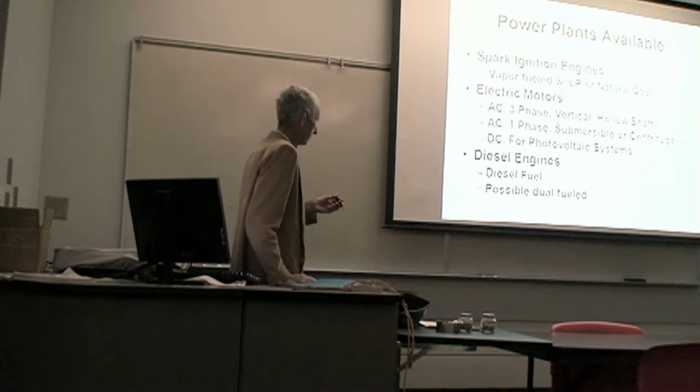Now, first thing we have to think about when we're selecting a pump, selecting a power source, is what's available to us as power sources. Spark ignition engines are the most common in the area, fueled by either LP or natural gas. There's electric motors for the larger farmers, 3-phase electric motor shafts. For you smaller farmers, they're single phase.

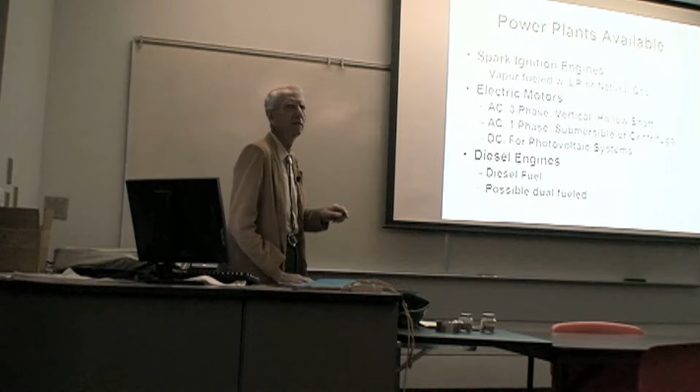Now, 3-phase is not available throughout the valley. It's not going to become available because El Paso is not looking for electrical load during the summers. They're already peaked out on air conditioning.

For photovoltaics, I showed my age here by saying DC. The new photovoltaic systems have microinverters on the back, so when you put in the PV system, you can get AC out of it. And you can get AC 1-phase, about 240 volts. So it's already set up to run a submersible pump.

And for systems up to about 10 kilowatts, El Paso Electric has to hook you up. They have to give you net metering, and they have to pay you about 10 cents a kilowatt hour that you generate, whether you use it or they use it.

If you're going to have a photovoltaic system, you have to be tied to the electric company, or else you can only pump when the sun shines. Tied to the electric company, you can pump anytime, and when you're not wanting to pump, the photovoltaic can still work and produce current back onto the electric company lines, up to 10 kilowatts. Bigger than that, you can't do it.

The last one I'll mention is diesel engines, using diesel fuel, possibly doing some dual fueling with that.

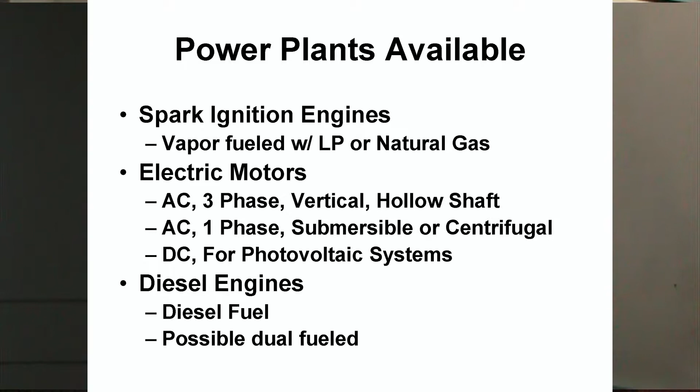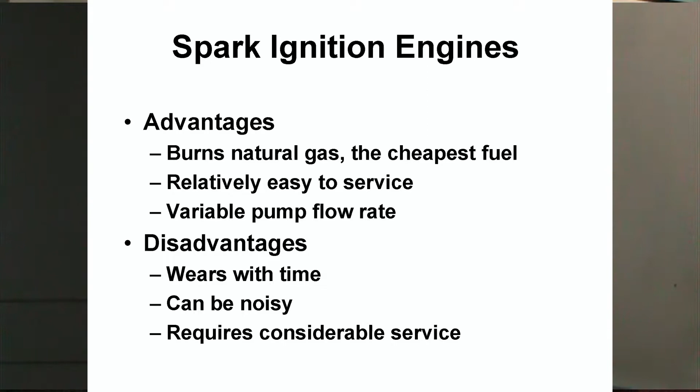The disadvantage is it wears with time. An internal combustion engine will last about so many million revolutions, so the faster you run it, the shorter life it's going to have. We'll talk about that later. In rural areas, where we've got enough people living out there, noise is a problem, and it requires constant service, changing oil and all sorts of things that you don't have to do with an electric motor.

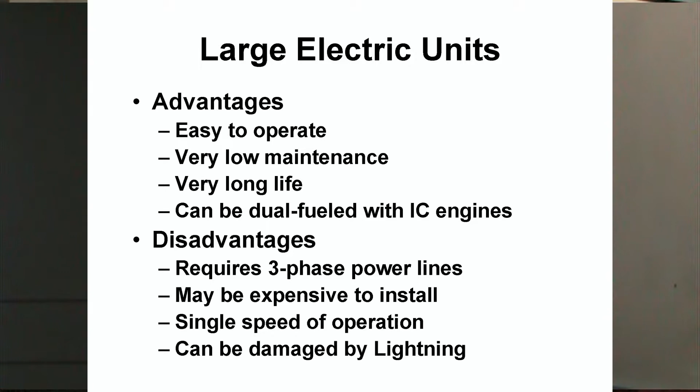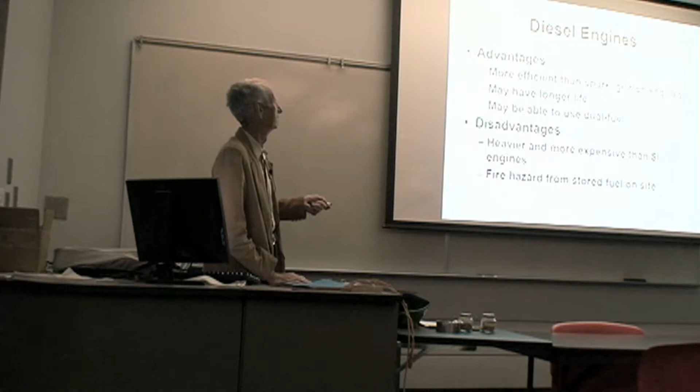Disadvantages are that diesel engines are heavier and more expensive than spark ignition engines, and there is a fire hazard and perhaps a theft hazard on the fuels that are stored out on the site.

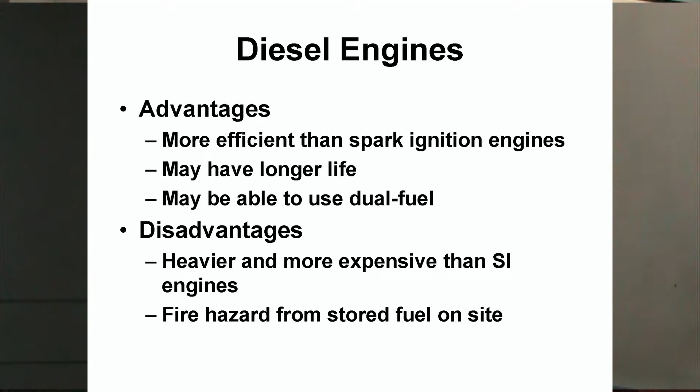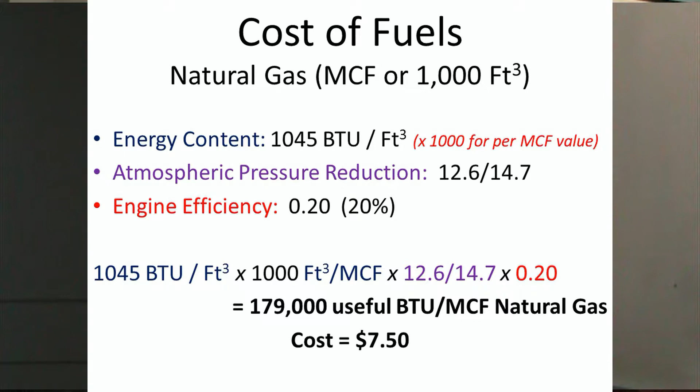Cost of fuels is going to be our most important factor. We'll do that using the energy content of the fuel. For natural gas, the textbook value is 1045 BTUs per cubic foot. We buy it per 1,000 cubic feet, so we have to multiply, and then decrease the effective energy for pressure. Our atmospheric pressure is 13, I use 12.6 over 14.7. Our engine's going to be 20% efficient, so out of the heat content of the gas, we're going to get about 179,000 useful BTUs.

When you do the same thing with LP, 97,000 is your average combination of butane and propane, divided by and times the same 20% efficiency, giving 19,000 useful BTUs per gallon. It takes 9.4 gallons of butane to equal an MCF of natural gas, so butane is about 3 times as expensive as natural gas on the same installation.

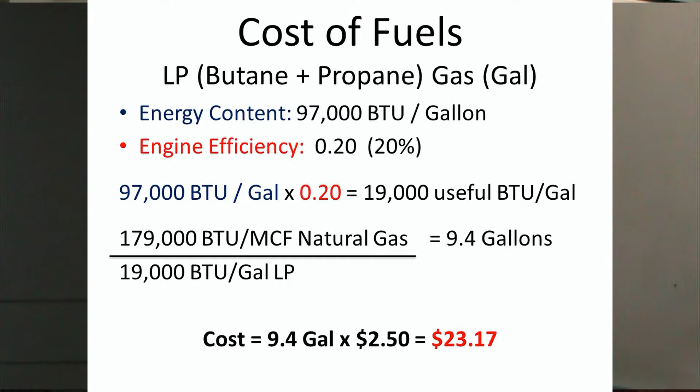Diesel fuel is 137,000 for 41,000 BTUs per gallon, a little more efficient than a spark ignition engine. Using 4.53 gallons, our diesel fuel is about twice as expensive as natural gas.

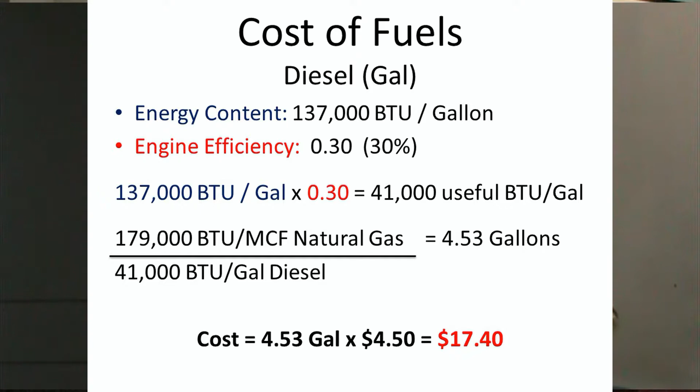For electricity, a kilowatt is worth about 3,415 BTUs. The electric motor is going to be virtually 90% efficient, so we'll get 3,074 BTUs per kilowatt, meaning it takes 58.2 kilowatt hours to equal the energy in an MCF of gas.

For small systems, which is what most of you all have, you pay for systems less than 7.5 horsepower about 12 cents a kilowatt hour, so that's 58.2, giving you about $7. So you can heave a sigh of relief, you're pumping as cheaply as the natural gas farmers are.

For large systems, there's a penalty for pumping during the afternoons, so this is an average of about 13 cents, costing a little more, about $7.57 compared to the $7 for a small farmer. For all systems, both electrical systems, you have to add $240 a year for site charges.

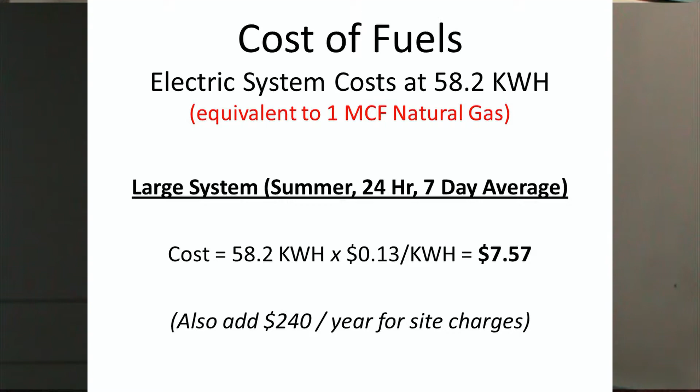Now we want to talk about sizing the units, and we sort of get away from electrical. I'll mention them as we go along, but this talk was really geared to engines.

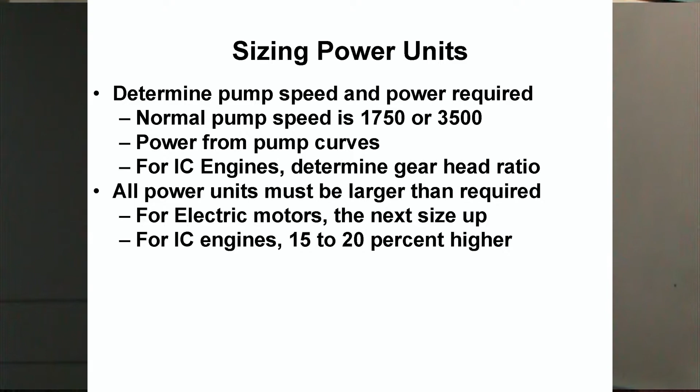We'll have to determine the pump speed and power required. The normal pump speed will be 1750 or 3500, as Dr. Samani pointed out, and we'll have to use the pump curves. For IC engines, you need to determine what gearhead ratio you need, and all units have to be larger than required. For electric motors, you just go one step up if it's a reasonable step. You don't want to go too far on electrical motors and have them way underloaded, because that begins to screw up the power factor—the amperage and voltage get out of phase, and El Paso Electric doesn't like that. They'll charge a penalty if they catch you doing it. So you don't want to be too big, but you want to be a little bigger. For IC engines, you want about 15 to 20% higher capacity than you're going to use, because the engine's going to wear and lose capacity over time, so you want it to have some reasonable life.

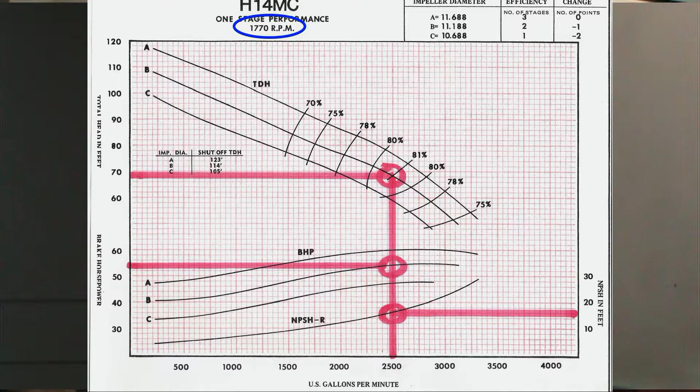Dr. Samani pointed out that you'd usually go to this pump curve and be somewhere here on the right. I just picked a point because I'm just doing an example here. This is a pump curve for a pump turning 1,770 RPM, and we've decided that when we match this curve to the pump, it's going to be operating right here—he would have wanted me to be down there, but we're here. What we're trying to get is the pumping head, and in this case we have 68 feet of pumping head. Then we project down to the power curve and find that we need 54 horsepower. Notice that this pump comes in 3 different sizes of impellers.

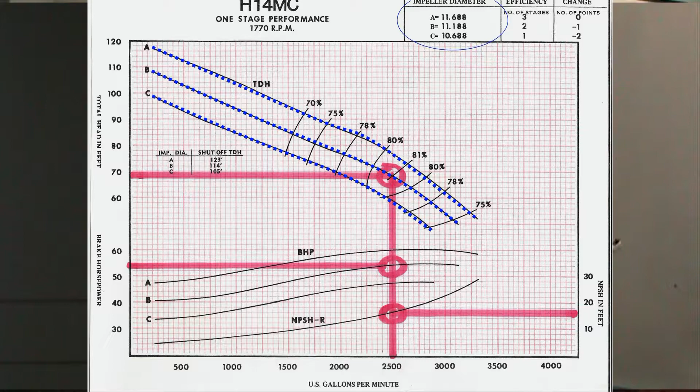That's these three curves, but we have to go to the same curve here that we were on up there. So using those figures, we can come in and start sizing our pump requirement.

Our horsepower calculation shows a pump requirement of 54 horsepower. You have to put some power into the shaft that goes down through the well, and that's a function of the diameter of the shaft and the length of the shaft. There's a formula in the engineering section of any pump catalog, and that turns out to be about 1.1 for the one I've selected.

The thrust bearing has to carry the weight of the shaft, the weight of the impellers, and the thrust of the water coming up out of the pump. So all of that combines to give you a thrust bearing load that, according to their formula, is going to be about 3 horsepower just to run the thrust bearing.

So this is the total that you'd get for an electric drive. For an electric drive, you require 58.1 horsepower. You're going to go at least to a 60, and as an engineer, I want a little cushion, so I'd probably go to a 75 horse. That'd be about the next one up.

For IC engines, we have a little gearhead loss, part of a horsepower, so the total for IC engines is about 58.7. Now we're going to oversize it 16% for wear, so that's 8.5 horsepower. We're going to use a test curve run under standard atmospheric conditions, which is sea level, so we have to do an altitude adjustment. A 67 horsepower engine at our altitude will require an engine that produces about 78 or 79 horsepower, because the altitude decreases the density in the air, and you can't get the power out of it without that air.

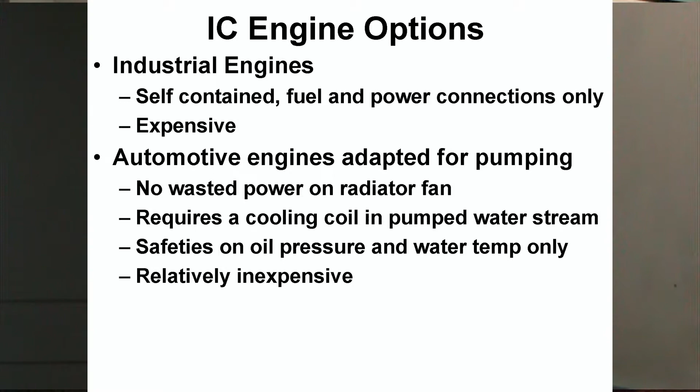They're relatively inexpensive. And where do you go for an engine? In the Southwest, you go to Buck's engines. This is some literature from Buck's engines in Lubbock, Texas. They have 3 sizes of General Motors engines that they use.

There's a small 4-cylinder. Their medium-sized one is a V6, 4.3 liter. If you talk cubic inches rather than liters, just remember the number 61 - there's 61 cc's, 61 cubic inches in a liter of displacement.

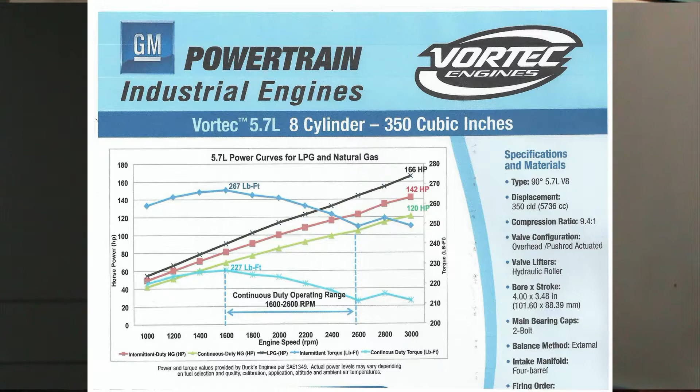If we go to the next engine up, it's a 5.7 liter 8-cylinder engine, a V8 engine, 350 cubic inches. If we look for 80 here, we come to it right there, and the light green line again is going to give us about 1,800 RPM.

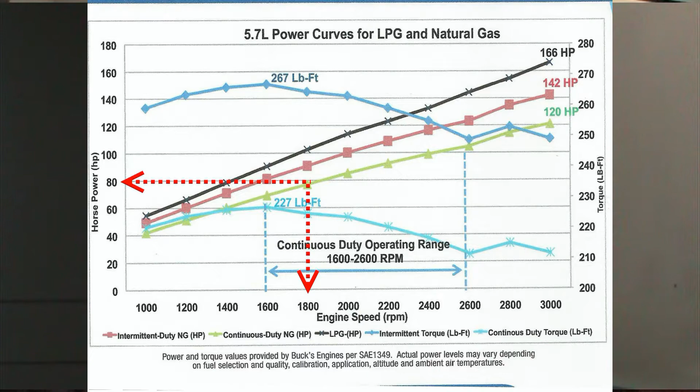So, if we took the 4.3 liter V6 at 2,400 RPM, we've got to slow that down to get a pump speed of 1,700, so we'd have to have a 4-to-3 gearhead. The list price for that engine is about $7,000.

We could also use the 5.7 liter engine, which gives us our power at 1,700 RPM. It'll let us use an old 1-to-1 gearhead, and in the valley, you'll find more 1-to-1s than anything else. That has a list price of about $7,600. The life of this engine is going to be greater than the life of the other one just because of the lower RPM. But you may have to take the gearhead to a machine shop and have a new set of gears put in.

Would the fuel consumption be different? Fuel consumption would be relatively the same.

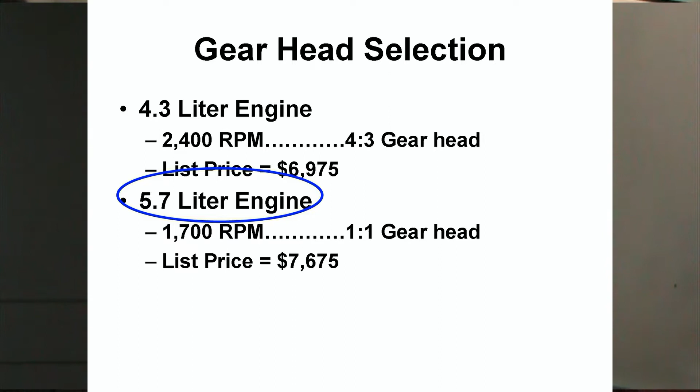The older engines, if you have one built up, it's liable to have the old compression ratio, which is about 8-to-1 for gasoline. When you have it built up, if you can get them, you want to put in propane pistons, so you go to high compression. These are high compression. Now, whether they come from the factory with high compression or they change the pistons, they're about 9.4 compression ratio. So they're in that hit.

Let's see how we're doing on time. Oh, we're in good shape.

Now, after you get the engine, there's a matter of making sure it's adjusted correctly. When you negotiate the engine with the salesman, find out if they've set the engine up on a test frame and tuned it for spark timing and for fuel-air ratio.

Now, this is a plot that we did on an old Chevy 292 engine, and we ran it at various speeds. We ran it at one speed and found the maximum power we could sustain with spark advances from 30, 35, and 40 degrees. Then across the bottom we ran air ratios from about 17 or 18 to 1, which is about as rich as it'll run. If you were running a gasoline engine over here, you'd be getting billows of black smoke coming out of it.

We didn't get that with natural gas. And then we ran lean ratios up to about 27, 28 to 1. You notice there's a point missing here—that's because it wouldn't run at that low a lean ratio. This is like a three-dimensional plot of efficiency with elevation.

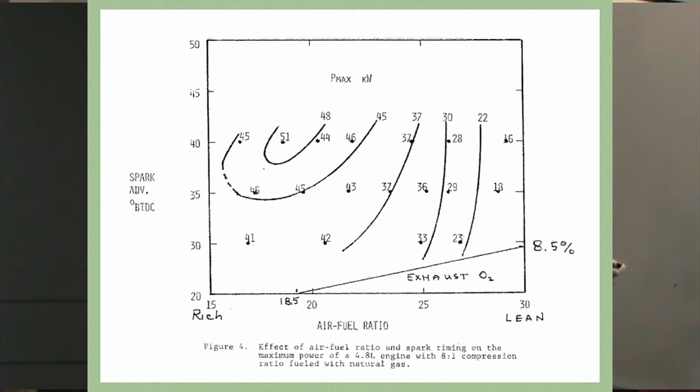With maximum kilowatts, this shows that the maximum power occurred right in this area. And if you project down here, we were also measuring O2 in the exhaust. We didn't get any exhaust O2 from the rich mixture until we got to a mixture of about 18.5 pounds of air per pound of fuel. That's where we began to see some oxygen. So we'd call this the stoichiometric ratio—it's when the fuel and the air were exactly balanced, and that's the point at which you get maximum power.

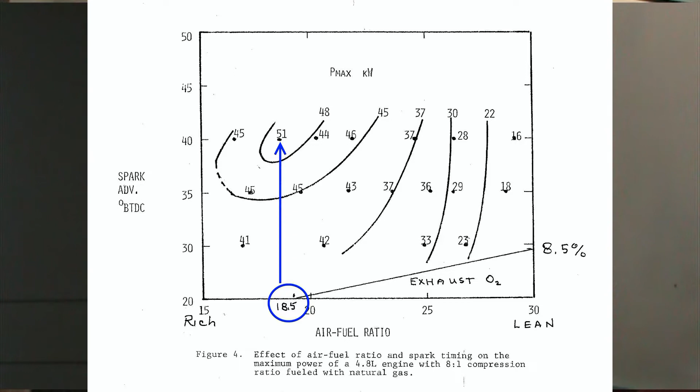So using this, you can set the spark advance up here between 35 and 40. Several of the farmers' engines that we checked, we had to get the farmer to come start the engine because he had to retard the spark in order to get it to start. Then he'd bring the spark up after he got it started, so he was operating way up in this high range. I don't recommend it because you don't want the engine to fire backwards—it doesn't like to do that. But this gives you a point you can find.

If you get the engine running under load, you go out there with a pair of gloves and get on that thumb screw that regulates fuel-air ratio. If you screw it down, you're making it lean—go too far that way and you're going to drop off, so you back up. If you get too far over here on the rich side, you're going to drop off power too. This is going to be the maximum power you can get, right in this rich zone.

Now, you should be able to find that point. That'll be the point at which the engine is pulling the greatest load—it has its greatest capacity.

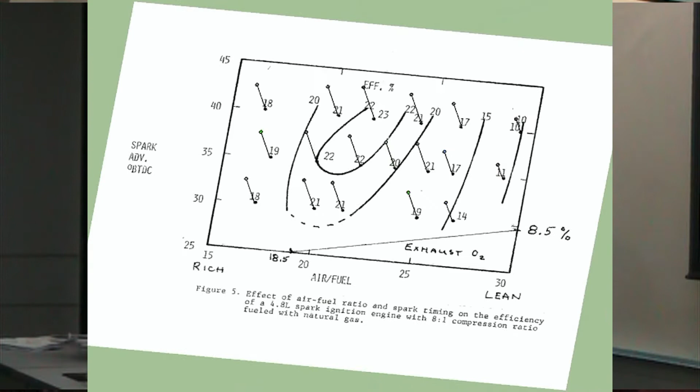Now this is efficiency, and you see that efficiency peaks out right over in here where you've got a little excess oxygen. That's because you're getting more complete combustion at that point, and we're getting efficiencies up in the 22 and 23%.

Normally, when we go to test a pump on a farm, we'd find 20% or a few less. Very few of them were at this high efficiency. The best efficiency we ever found on a pump was 26%, and that was an old Minneapolis Moline running with a beautiful load on it and fully loaded.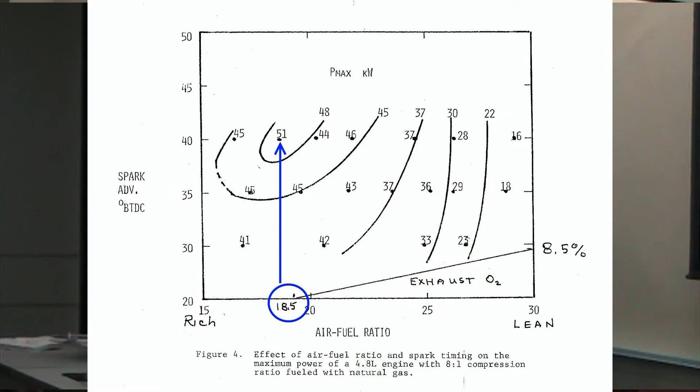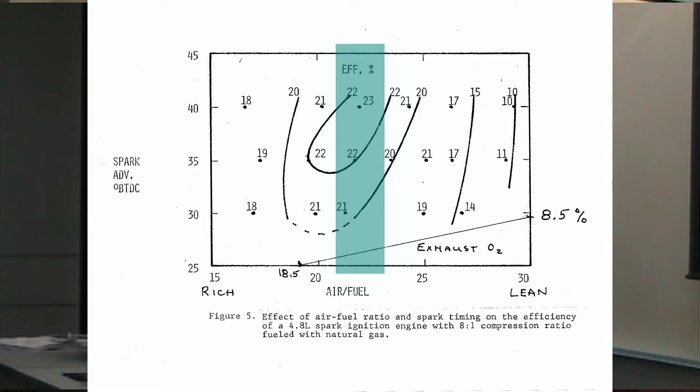And so it was getting that kind of efficiency. Now, so when you come here and you find this point, then you want to lean it down a little bit because you want to really be running at this point. That's where you're going to get the most efficiency. So tune it to the highest speed and then back it off a little bit on the fuel-air ratio.

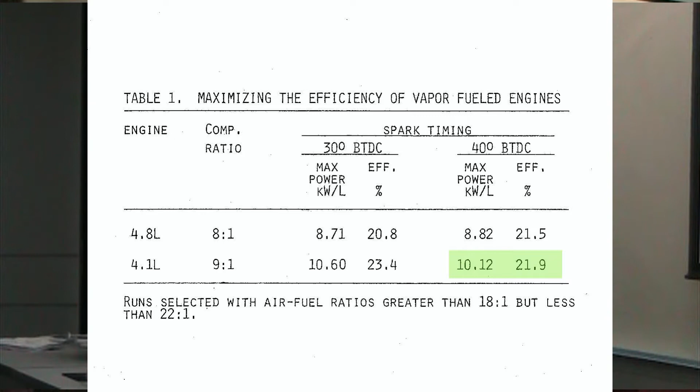This is just a chart that shows you the effect of compression ratio. This is an old 292 compared to a 250, with an 8-to-1 compression and a 9-to-1 compression. At maximum power, the higher compression, even though it's a smaller engine, will produce more power and more efficiency. At 40 degrees, more power, but for some reason you get about the same efficiency. But there's always an advantage, if you can get them in an overhauled engine, you're going to want to put in propane pistons.

So the conclusion from this is that natural gas, of course, is the most economical fuel. Electricity is about equal. New IC engines must be matched to the load and loaded to about 80 or 85% of capacity at our altitude.

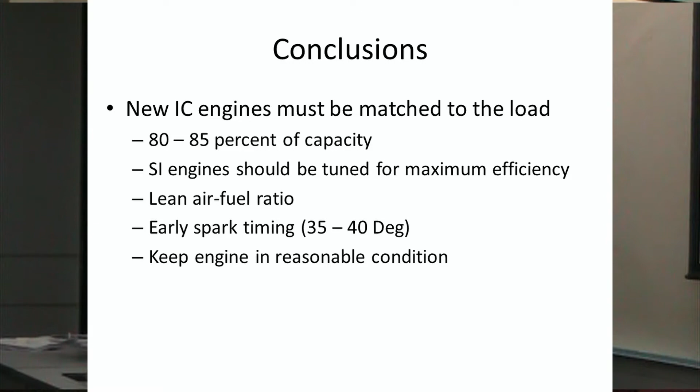SI engines should be tuned for maximum engine efficiency: lean air-fuel ratio, early spark timing, and keep the engine in reasonable condition. At the end of the season, you ought to go out there, pop off the valve cover, pull the plugs, open the throttle wide, and run a compression test just to see what kind of shape you're in.

If you find a low cylinder or two, squirt some oil in them and run a wet test. That'll seal the rings. Then, if you still get the low reading, you know you've got a valve problem. That gives you a chance to work on that valve problem before it ruins the head or something.

And lastly, be prepared for higher fuel prices. We may be the leading country in the world, but other people are beginning to compete for hydrocarbon fuels. So diesel fuel and propane are going to continue to go up. Natural gas in the United States appears to be very stable, though whether it will continue that way as people begin to shift onto natural gas is uncertain.

Another thing staring us in the face is that atmospheric carbon dioxide is going to become a problem, and we're not doing anything to limit our production of it. So someday we're going to have to do some remediation. The money's got to come from somewhere, probably from the users of carbon-based fuels.

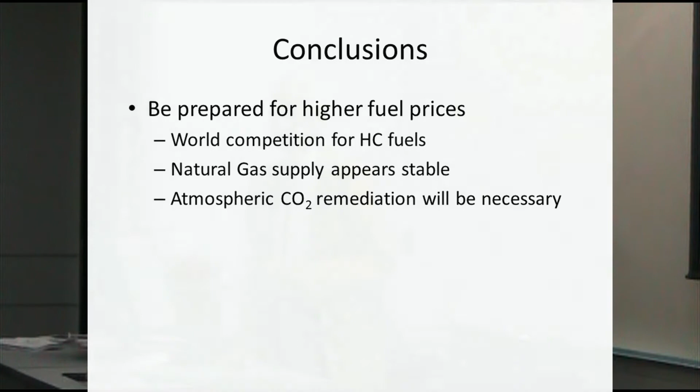One of the things I didn't mention, a fuel for the future, is hydrogen. You can make hydrogen with solar power and water. When you consume the hydrogen, you put it in a fuel cell and break it apart, then recombine that hydrogen back with oxygen and make water. No contamination. But it's hell to store, and it's hell to make, and we haven't worked out the wrinkles yet.

So those of you who are young enough to work on something, we could sure use some work in that area. It's not practical at this point, but maybe in the future. With that... any questions?

Question? Yeah, Tom, question. Dr. Abernathy, is there a rule of thumb for engine life in terms of millions of RPM? Is there something you use?

I don't have a number for that. It's just... a car now will run about 200,000 miles. When I was a kid, if you had 100,000 miles on a product, you just put it in the junkyard or overhauled the engine. So they've at least doubled the life of the internal combustion engine. They do that by induction hardening of the cylinder walls, and they've done better on piston rings and pistons. So the automotive industry has come a long way. But you can kind of think about how many revolutions an engine would turn to run, say, 200,000 miles at 70 miles an hour or something.